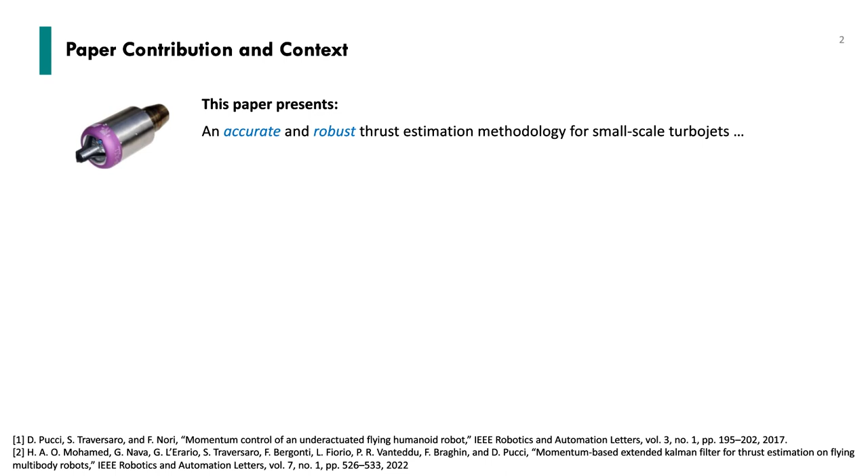Our paper presents a methodology for accurate and robust thrust estimation on small-scale turbojet engines using limited and low-quality measurements, which is often the case for these engines.

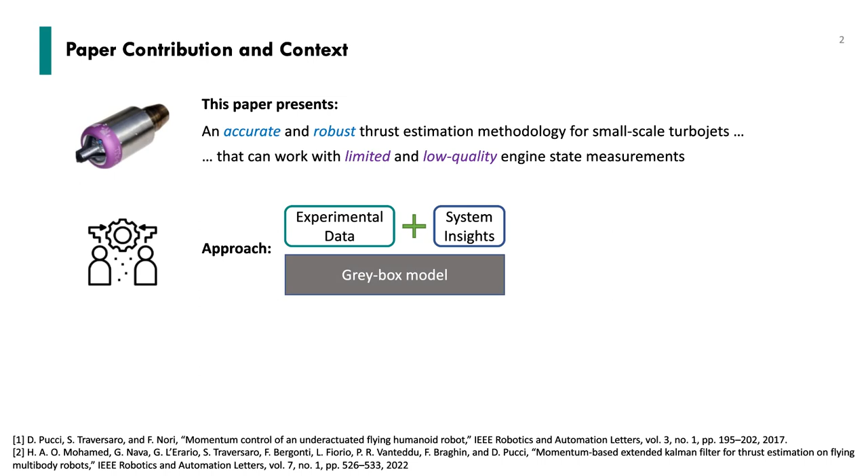Our approach is quite simple. First, we use our testbench data and insights to construct a gray box model. Then we design an extended Kalman filter around this model that can estimate engine thrust. The context of this study is the iRonCub, which is an aerial humanoid robot powered by 4 turbojets.

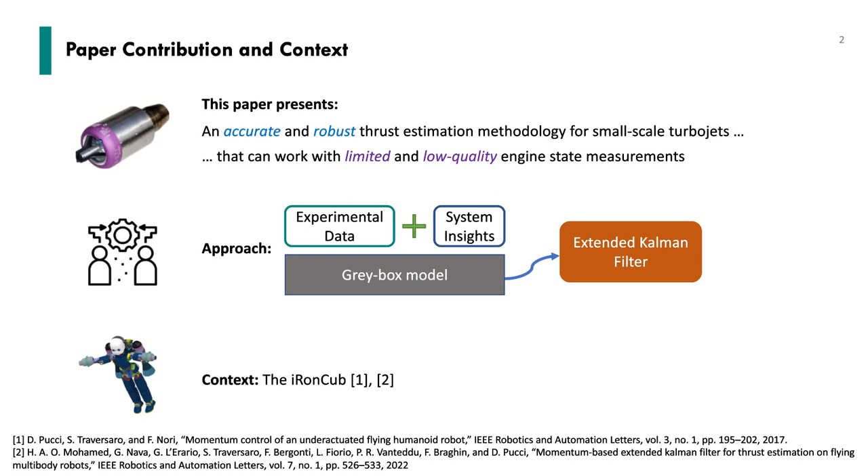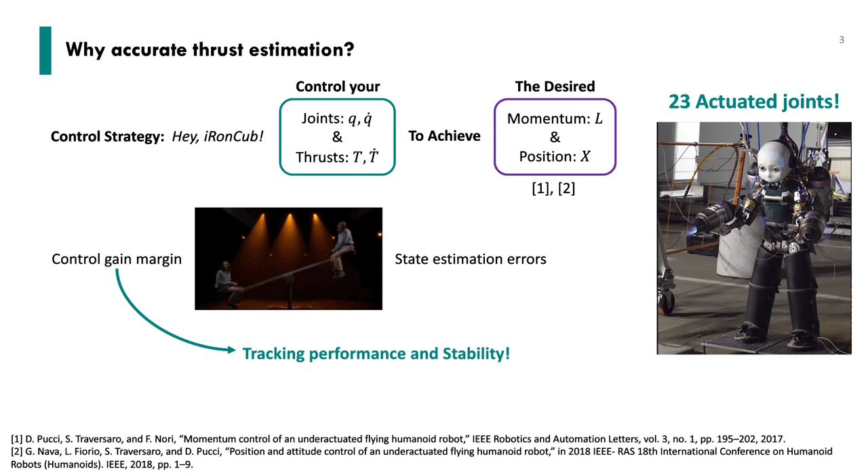So why do we need accurate thrust estimates? Well, in the control problem of the iRonCub, the thrust is defined as a state that is controlled. And the lower the state estimation errors, the higher the control gain margins we get, which is crucial for good tracking performances and stability. Let us now dive into the state of the art.

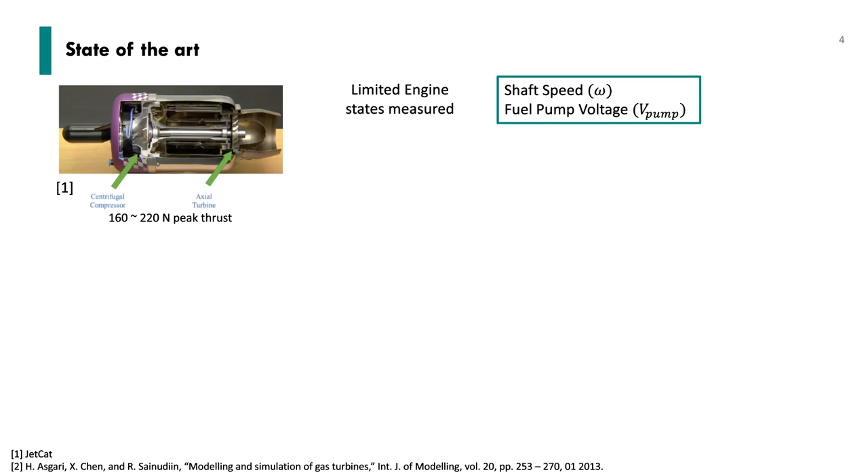We are studying small-scale turbojets like these in which the measured states are limited and the measurements are often low resolution. Several models in literature have been explored that connect the measured states of the engine with the unmeasured states. However, a methodology that considers the model and measurement uncertainties and also accounts for engine failures to give accurate thrust estimates is lacking. This is the gap that we want to address.

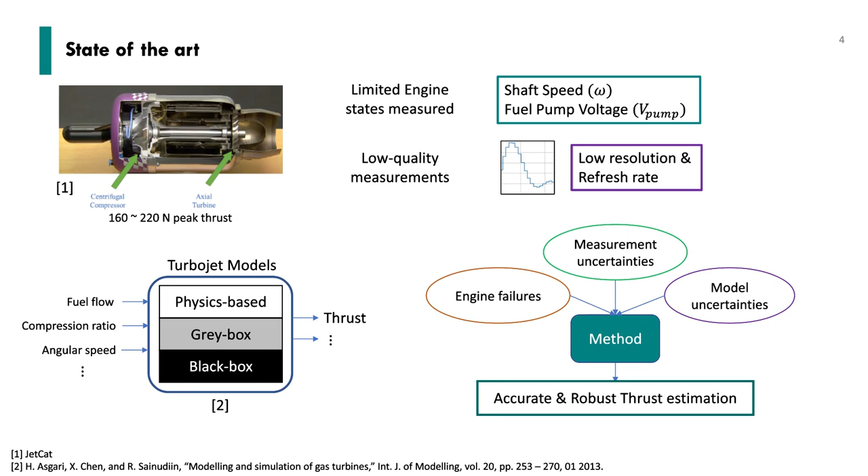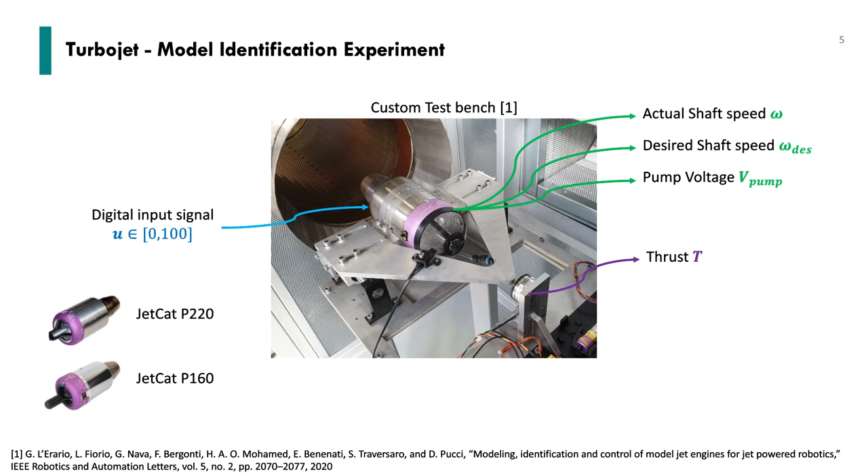So we start with the model identification experiment in a custom test bench where we apply input signals and record the responses. The thrust is measured with a strain gauge sensor and the signals collected are filtered offline.

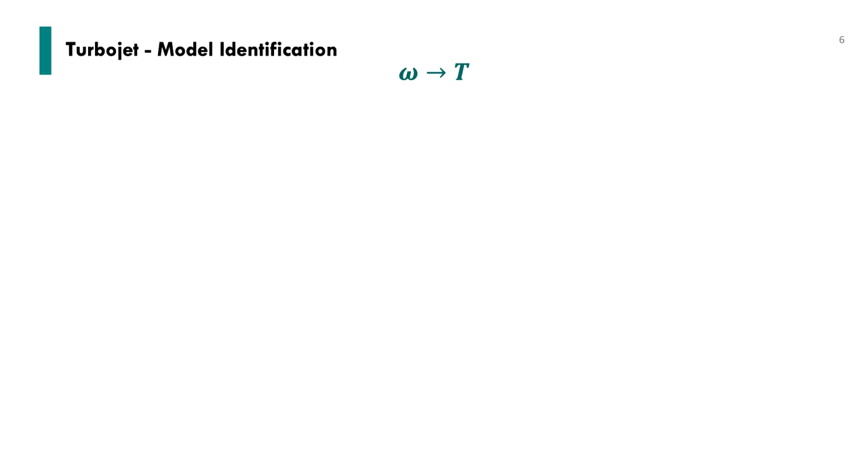The measured quantity that has a direct relationship with engine thrust is the shaft speed. For subsonic engines with low expansion nozzles, the thrust can be expressed accurately by an instantaneous function like this one. However, this model relies on the shaft speed measurements that have low resolution and are also affected by sensor dynamics.

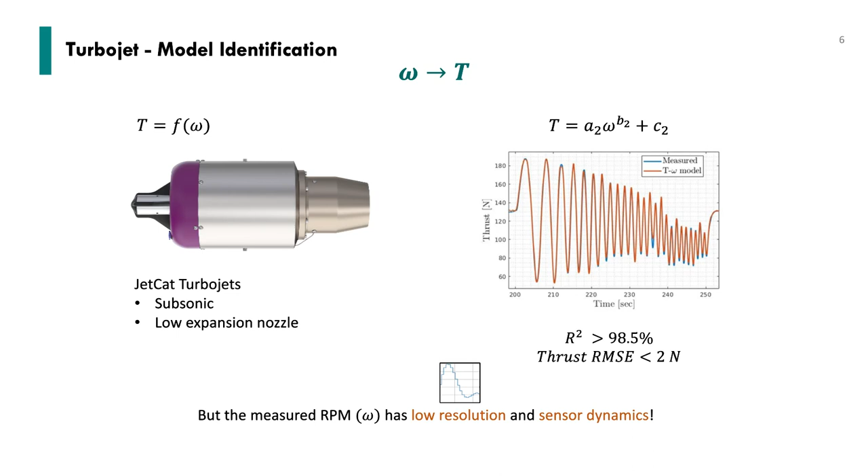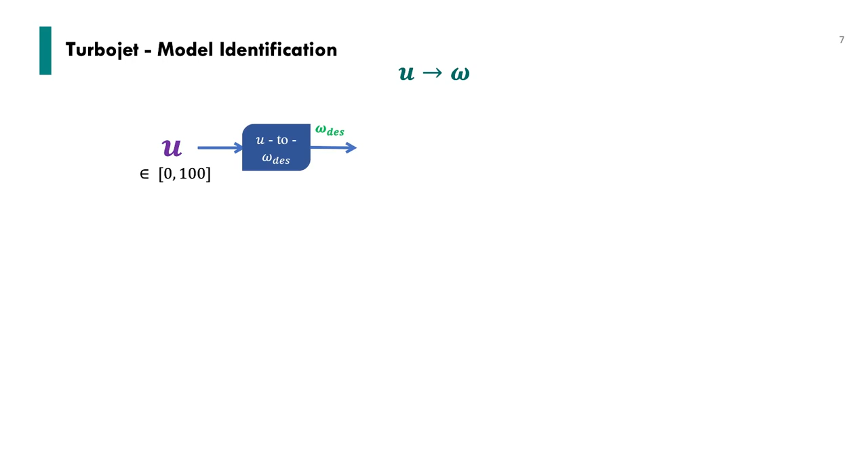So let's find out how the shaft speed behaves. From our insights, we figured out that the control structure of the ECU is as follows. The input signal U is mapped to a desired value of RPM, which is achieved through a feedback loop. We want to explore the relationship between the input signal and the shaft speed.

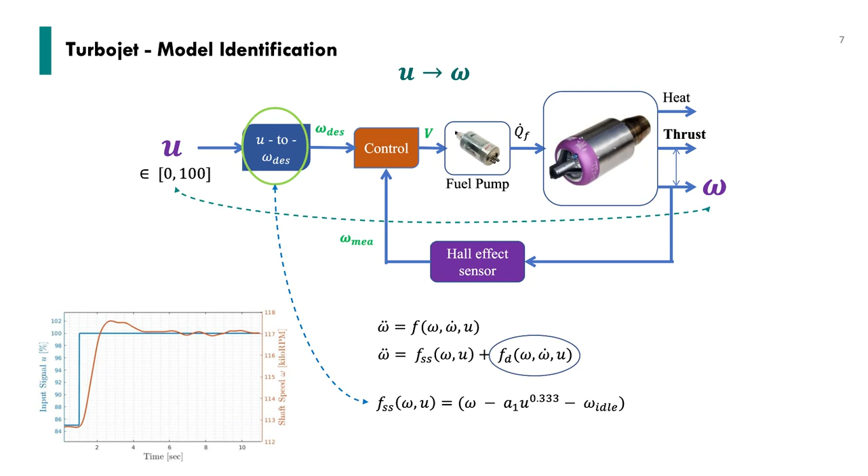Looking at the step response, we decided to model this relationship with a second-order nonlinear state space representation. The steady-state behavior is known by our knowledge of the transformation between U and omega desired, so only the dynamics have to be identified. For this, we use a state-of-the-art technique called SINDy to arrive at a gray box model. Here is how the model performs on the validation dataset.

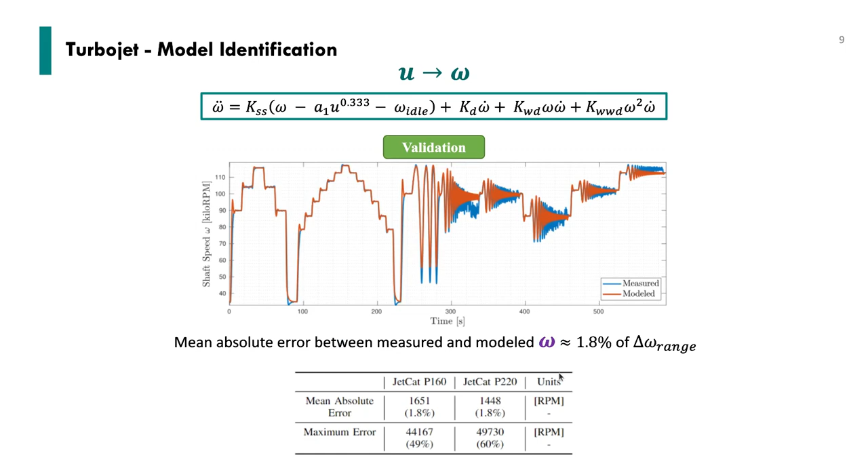Now, we want to design an EKF that fuses the model along with low-resolution shaft speed measurements to obtain a smooth estimated shaft speed, which can be transformed into estimated thrust.

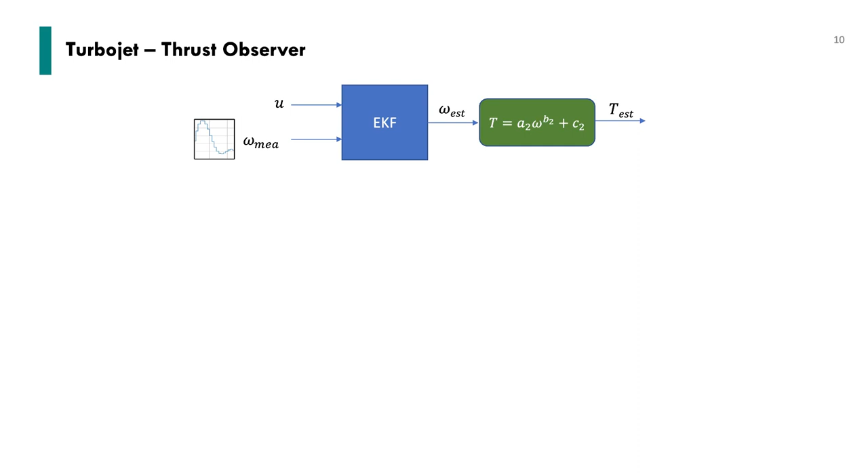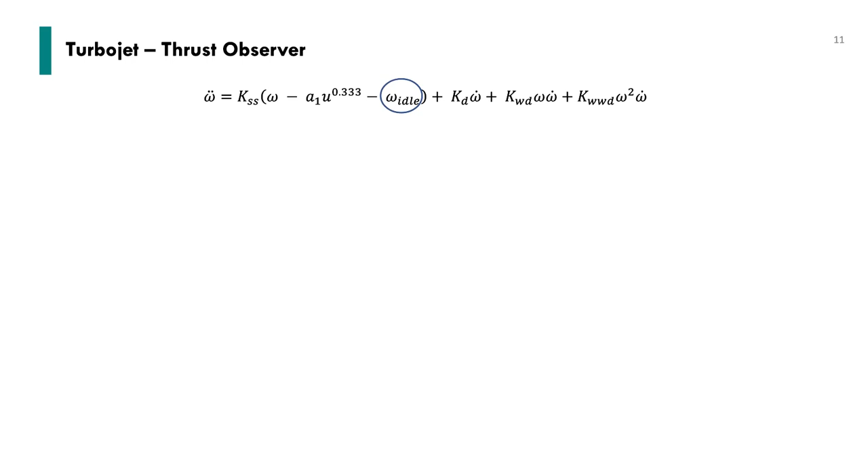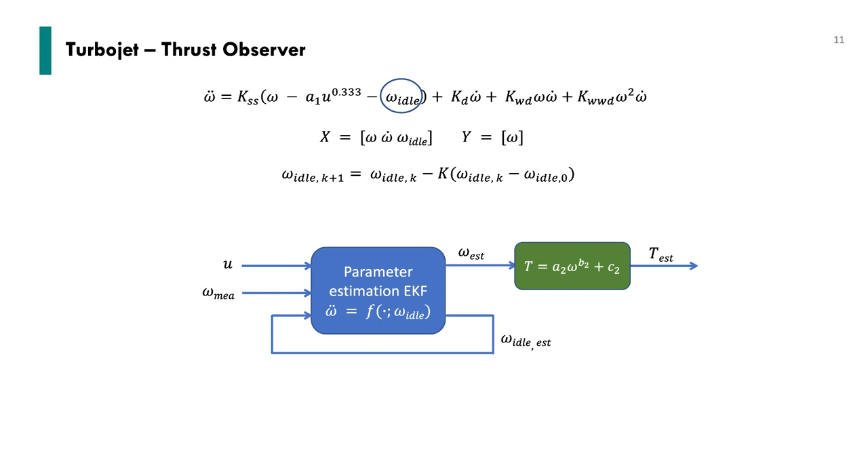We want the EKF to deliver smooth and accurate results even during engine failures, so we exploit the parameter estimation algorithm. Basically, we allow this parameter, omega idle, to be estimated online by the EKF by passing it as a state. So whenever an engine failure happens and the RPM drops, the EKF observes this and modifies the value of omega idle. This way, we can get smooth and accurate estimates under all circumstances.

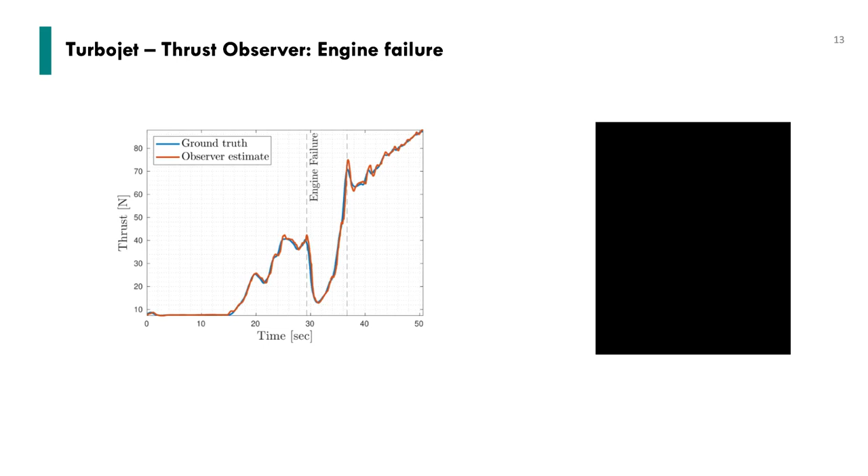The designed EKF performs remarkably well on the test bench, so we decided to deploy it on the iRonCub. Also, during an engine failure event, we observed that the EKF still delivered accurate estimates.

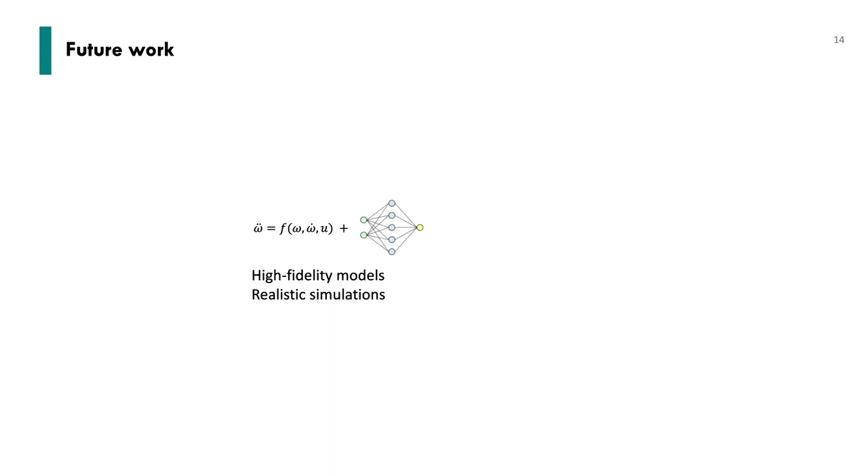And that's all. Future work would involve creating high-fidelity models for the turbojet to bridge the sim-to-real gap and characterize the performance of turbojet under varying atmospheric conditions, where the umbrella objective is to make the iRonCub fly.